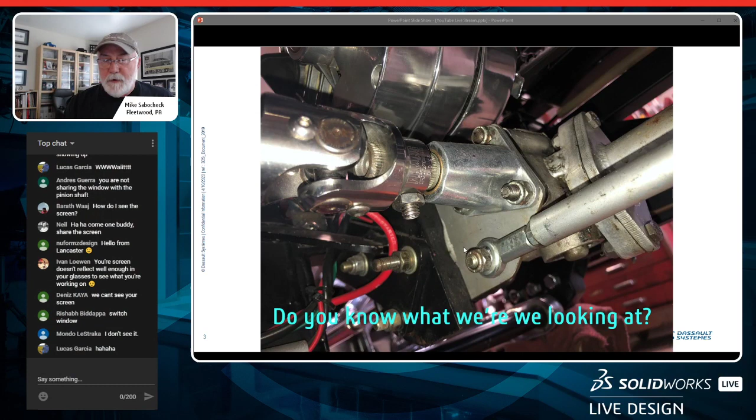So I'll describe that again. We've got the pinion shaft here, and that pinion shaft extends itself through the rest of the housing. I made this pinion support right here to support the shaft, because when I was turning the steering wheel, I would get some deflection at the end of the shaft, and that deflection was causing a little bit of a pause in my steering, so it wasn't very responsive. Along with the support, I also needed a bearing, so I used a bushing right here, which is pressed into the housing. I did some work prior to this, and made up some sketches of both the shaft and the support plate. Then there was this little cap used right here that mounted over the opening for the pinion shaft, which included a little bit of an O-ring, which acted as a seal on the end, preventing dirt from getting into the housing and affecting the gear.

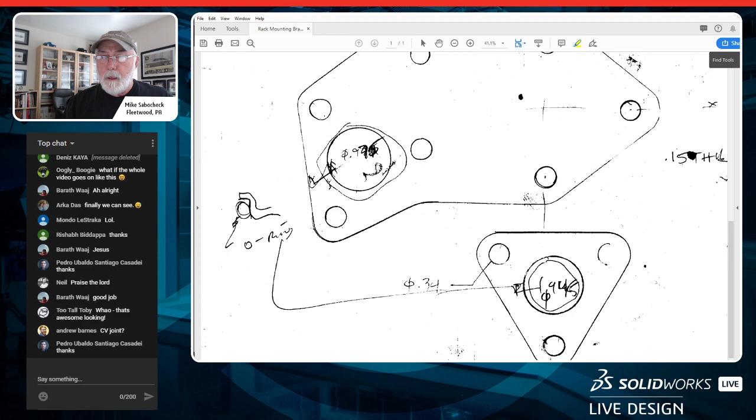So our task now is to design up this housing, and when I was doing my sketching, I used the appropriate tools here, a vernier and a machinist scale. This is not a ruler, but a machinist scale, so we can measure things to like 10,000ths of an inch, getting things fairly accurate.

Now a little bit about my hot rod. Her name is Violet, and you can probably figure out why, she's a pretty vibrant purple color. She's a 1931 Ford Model A four-door town sedan. Ford made two versions of a Model A sedan, a two-door and a four-door version, and I have the four-door version, which has three side windows, whereas the standard Model A had two. This is an original car, made back in 1931, so she's coming up on 89 years old, and she's been a hot rod for about 50 years. I can trace back to when she was built. I know the builder of the car, and we've talked many times about the build of the car and what he did and where he found the car to build the hot rod from.

I also have a magazine from 1975 that Violet was in. One of my passions is just to work on cars. Not only do I work on the hot rod, I've got another car in the garage, an MGB GT, that I put a lot of work into. So this is what I do on weekends during the wintertime when I can't be driving my cars.

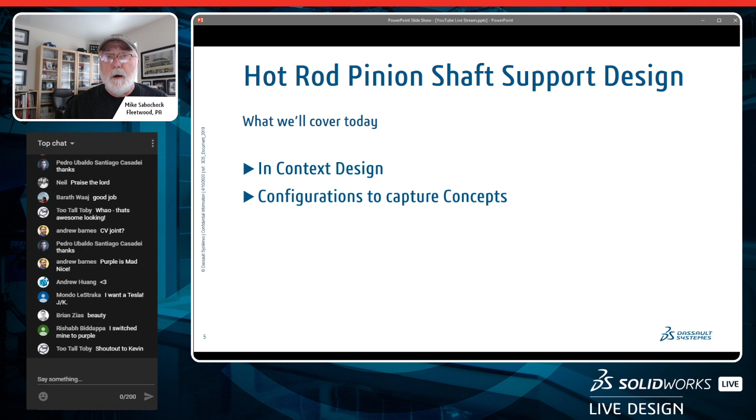Now this is what we're going to be covering today, so I want to give you a heads up on some things. In-context design: this design lends itself really well to being an in-context design. So what is in-context? Working within the context of the assembly to help me design my part. Next, configurations to capture the concepts I'm going to come up with, and not just one concept, but three different concepts. My mantra is: any work worth doing is work worth saving, and I can save that through the configurations.

Next, the property tab builder, probably a little known utility within SolidWorks that helps me capture custom properties pretty easily using a tab on the task pane. And smart components - we're going to be using a smart component, that bushing is a smart component, and I'm going to show you how to build them. It's pretty easy. Again, doing something once but leveraging it many times over, so we're not having to do this type of work on a continual basis.

So let's move over to SolidWorks here and get to work on our design. Like I said, I've already modeled up the parts that I'm going to need in order to design my housing or my support. So I've got the shaft and I've got the support plate.

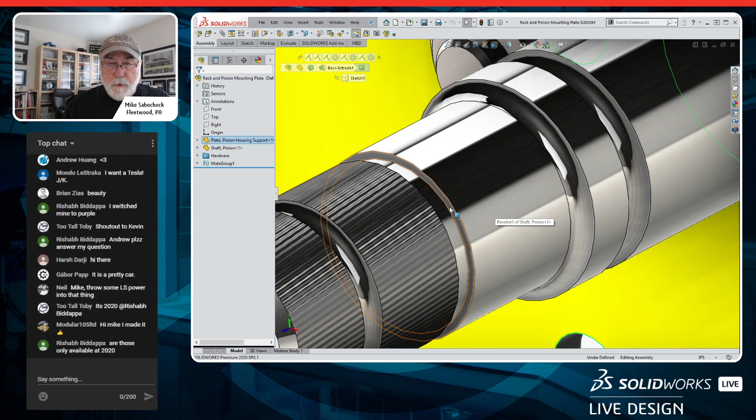Now if we just do a quick measurement here, just to give me an idea of how long I need the support for the shaft to be, SolidWorks is telling me that's going to be 2 inches, from the face of the plate out to the end of where the housing is going to end. So that 2 inches is going to be an important distance for me. I've got a lot of information here to work with.

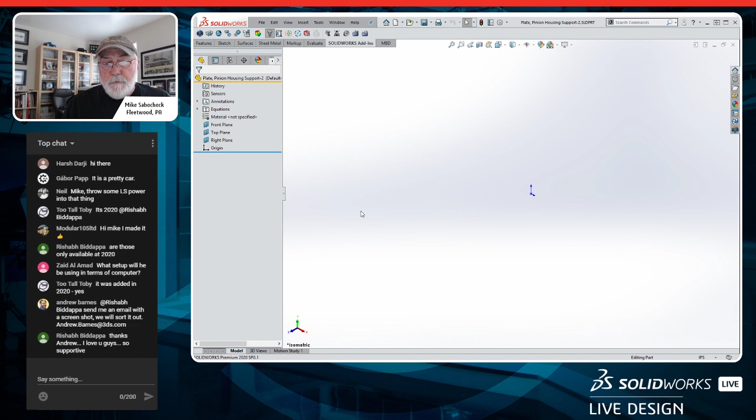So right off the bat, let's go into SolidWorks and insert a brand new part that we're going to use. This part here will be called - I've already got one there, so we're going to make a new one, so I don't have to type very much out here. Then where are we going to orientate this new part within the assembly? We'll put it and orientate it to the front of the plate. So we have that captured. My sketch is now open on the front plane of my new part.

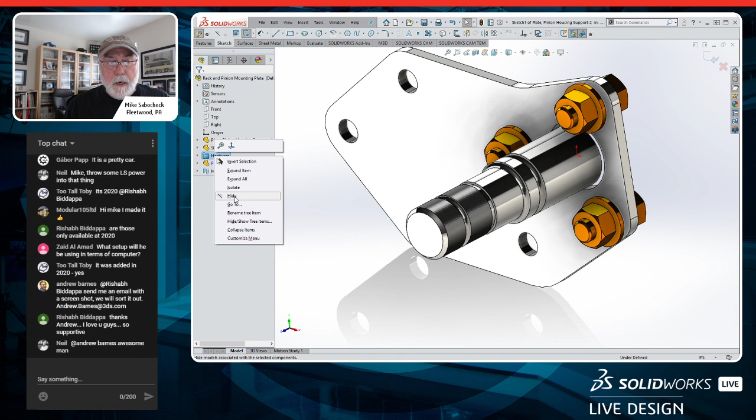Now I'm ready to start sketching, but let's get rid of this hardware here. Notice I've got my hardware in a folder, so that allows me to quickly hide them and manipulate them without having a very long design tree. Now I've got some edges here that are going to help me start my design - these 3 edges. My question is, do I want to create in-context relationships between my new part and this plate? I'm going to say yes to that, because this is pretty much a one-off design, and I just want to use these edges right here to get my design started.

Now I've got full control over that, meaning I can use an option here to turn off external references. So when I create my sketch, for instance in this case, if I go ahead and turn that off, and convert the edges that I've selected into a sketch that's blue - and we all know in SolidWorks that if I get a blue sketch, that means it's underdefined.

Well, that's not really what I want, so let's get rid of that. Let's turn our external references back on again, and I'll convert the edges again. And then I get those edges, and they're black, so it's telling me that I'm fully defined.

Okay, cool. I'm just going to extend these arcs out here a little bit. I'm going to add a circle to kind of mimic the other ones here to this hole. Wake up the center and drag that out some distance, because we're going to make it equal to the other ones here, equal to those two.

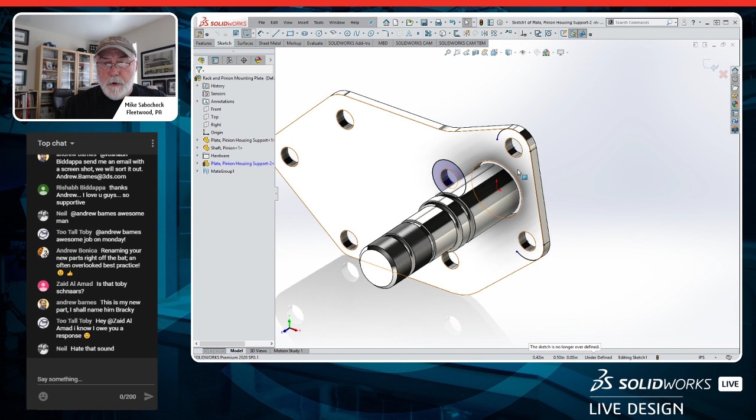Because it's got a dimension, we can get rid of that and the arrow too. Now I'll just add a line and create a tangency on both ends of that line. Double click and space to end that right there, then pick up the other one and create another relationship down here as tangency and coincident.

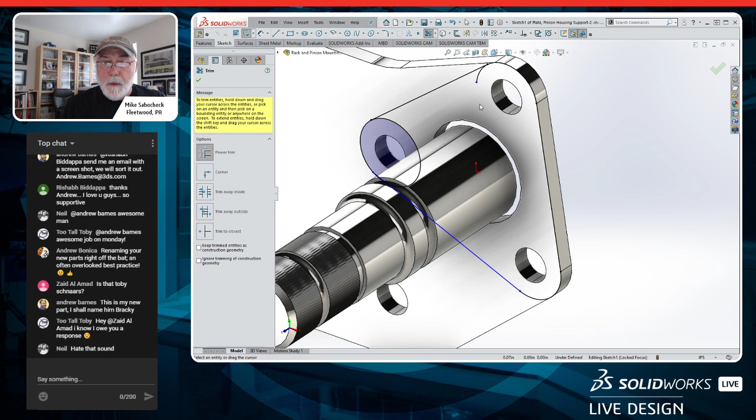Now we've got some additional geometry we need to get rid of here as far as the sketch is concerned, so we'll get rid of that guy, and this one, and this one. I've got to make sure I got a tangency relationship right here between these two. Oop, wrong button.

Okay, so we can finish this off pretty nicely. There we go. My sketch is black, it's fully defined, but I didn't even use a dimension or anything like that to capture my design intent.

Additionally, let's take these edges here of the holes and convert these into sketches also. So that now completes my profile of the flange that I'm going to use for my support.

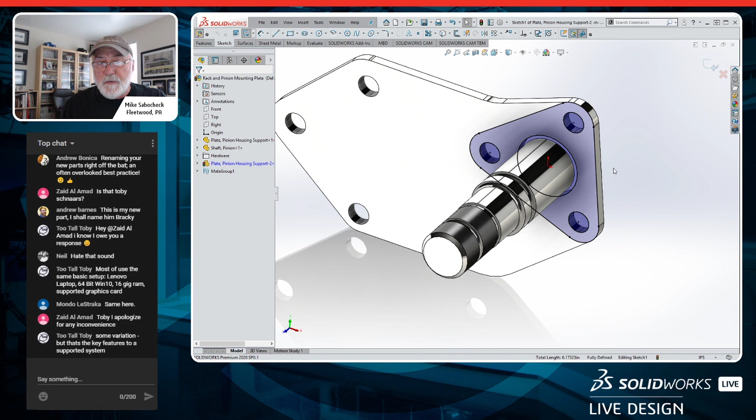I use the S key a lot. If you're not using the S key, try to use it, because it will cut down on your mouse travel and what you have to do. That S key allows me to access all of my favorite tools that I need when I'm working in SolidWorks. So I've got my first feature created.

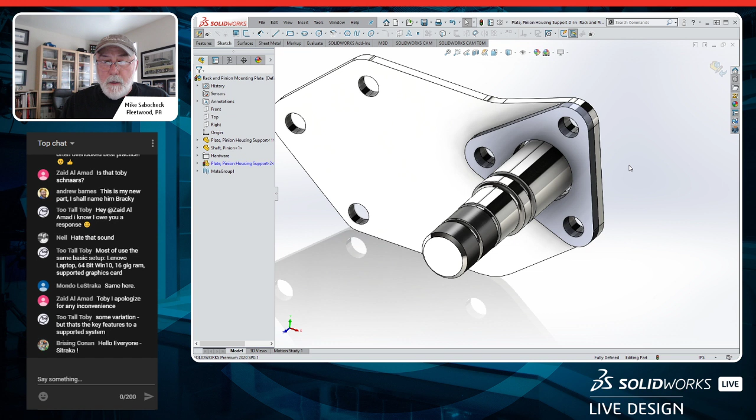So let's move over and open up the part in its own window here by itself. All right, let's zoom in here a little bit.

Now, good practice is to name your features as you go along here, so we're going to call that the flange.

I'm going to now start to do concepts on what I'd like my part to look like. So maybe the first concept I came up with was just something fairly simple, a cylinder that will extrude out from the face there. We'll make it 1 1/4 inches.

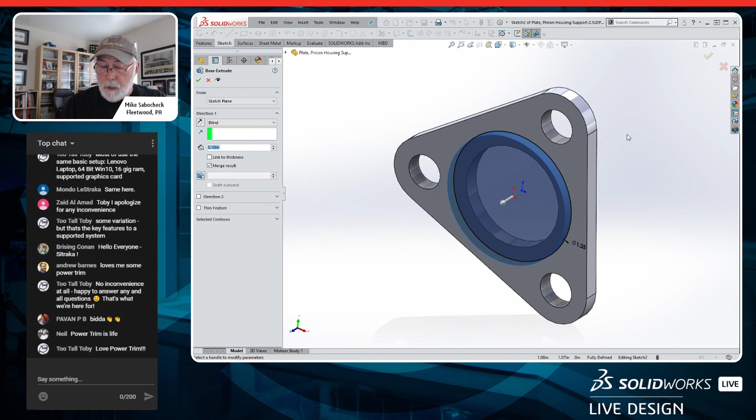We'll just extend this out, and we've got 2 inches. Now, the thickness of my flange is 150 thousandths, so my extrusion is going to be 1 inch and 850 thousandths. So all total, that will be 2 inches from the back to the front. Just a simple little extrusion.

Now, the other thing we're going to need to think about is maybe I'd like to have some ribbing on this to support it a little bit better, because we're going to be hogging the internal portions of this cylinder out in order to get the shaft through.

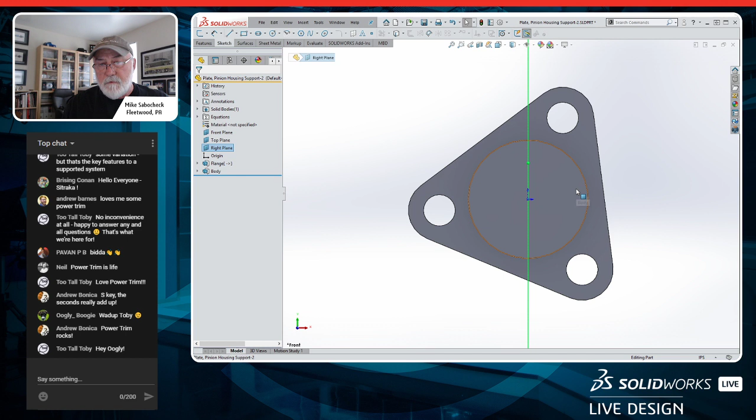So if we were to look at a front view here and look at the reference plane, the top plane is going through there. Well, that's not a really good plane for me to sketch on, nor is this a good plane to sketch on. So really what I'd like to have is a plane that bisects this face over here, or this edge. And that's exactly what I'll do.

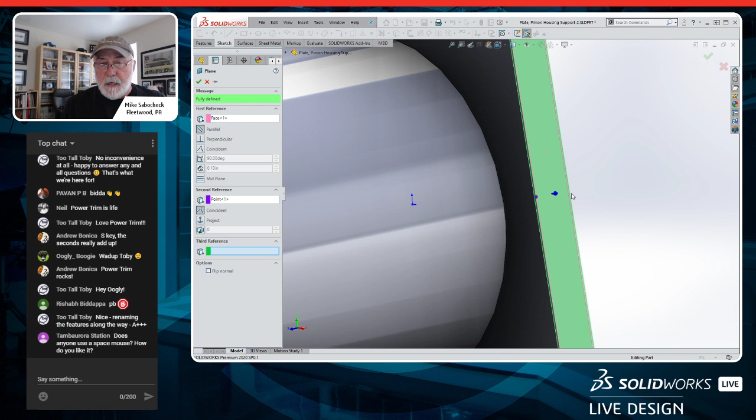So we'll select this one, we'll create a plane. I've got my first reference. My second reference is going to be the midpoint of that edge, and the third one is going to be the opposite side. We'll grab that midpoint right there, and that will now create a plane perpendicular to that face and allow me to sketch on that plane.

Okay, and we'll look normal to it. We'll just create a line down here and end it at the silhouette edge. Let's add a dimension.

And we'll just round it up to about 1 inch and 600 thousandths. Okay, all right, so that looks good. So let's create a rib and just say okay to that. Now we're good to go. So we have our rib created.

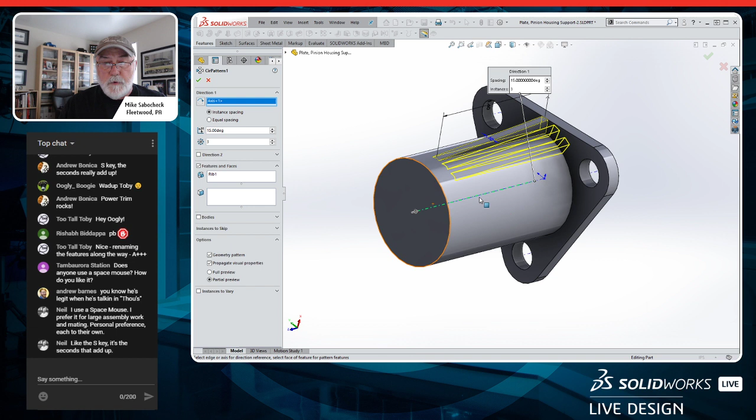Now obviously one rib is okay, but I'd like to have 3, and the best way to do that is to just go ahead and pattern these around the cylinder. So we'll grab our feature, which is going to be the rib. The orientation or direction is going to be my axis, and we'll go 120 degrees 3 times.

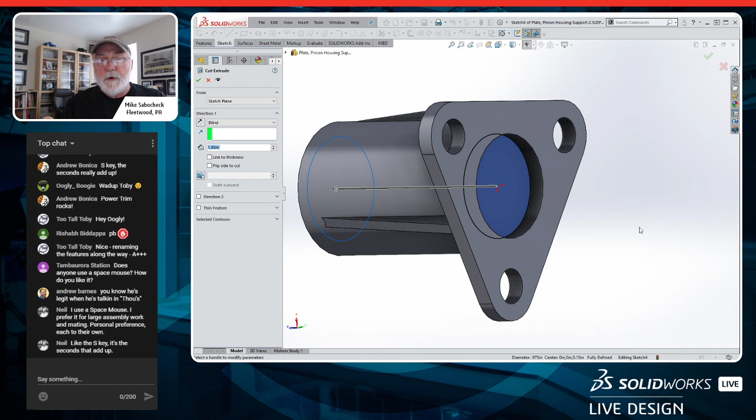All right, so now we've got our part almost completed. One thing we could do back here is open up a sketch, convert this edge to that edge right there, and then we'll use that as a cut, but we're not going to go through all because I need to leave some material to be able to put the bronze bushing in. So we'll go 1 inch and 350 thousandths, or 1.35 inches, and we'll just cut that material away.

All right, now maybe the last thing I need to do here is round and fillet the edges, and so we'd like to have some smoothness here. But let's make sure that we've got our features named. We got the rib.

We'll just call this the rib pattern. And we'll just say cut for shaft. All right, if I can spell correctly today. There we go. All right, so rounding and filleting.

Now I can go ahead and window select all of the edges that we see right here, but I'm not going to do that. I'm going to let SolidWorks help me find the edges that I need to round and fillet. As I peruse through the selection toolbar right here, it's highlighting the edges that it will round and fillet. And then I just need to apply the size of fillet and round that I want.

Okay, probably got a couple edges in here that I don't need. I see what the problem is. When I created my sketch for the rib, I didn't get it completed to exactly where I wanted it to be. It needs to be up onto the edge up here.

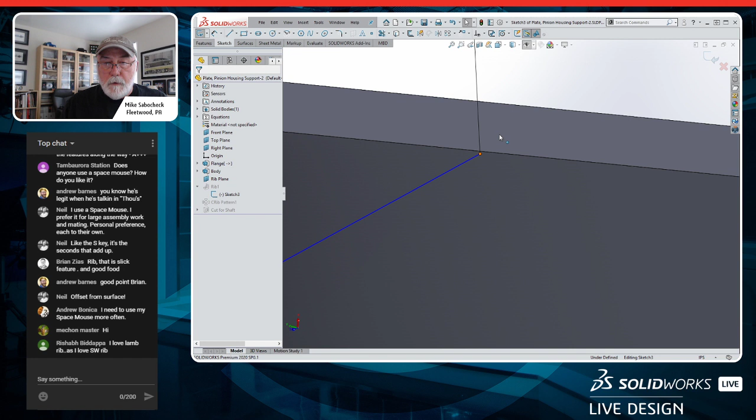So let's create that pierce relationship. That's one of Toby's favorite commands, is that pierce relationship. Okay, let's go back to the round and filleting. Again, just select an edge, and we'll go grab those. There we go.

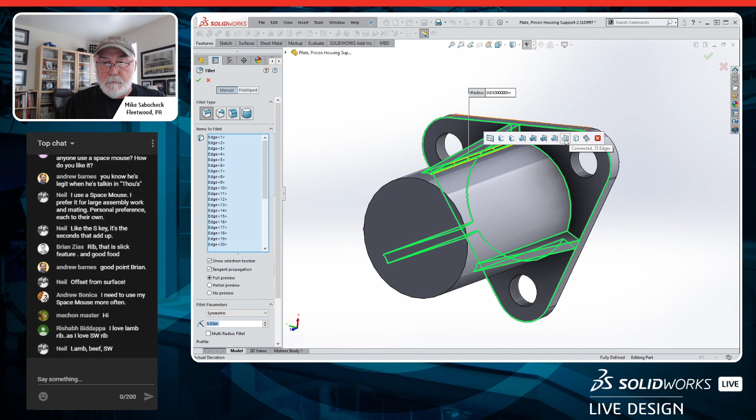Okay, now this looks pretty good. Now maybe we could put another one here, but we'll leave it right there.

Now, as I said, I'm going to create configurations here of my support. So we're going to call this concept 1. And then we're going to create another one while I'm here, and we'll obviously call it concept 2. And we'll move over to the other side.

Now I'm going to take all of the features for concept 1 and add them to a folder and call it concept 1. So I've got all of those moved over into that folder, neatening things up. And then I could take the folder and suppress everything in the folder.

Now my second concept, maybe I'd like to make it a little bit more fancier, right, as opposed to just a straight cylinder. So again, we'll open up a sketch here, and the first thing I'm going to do is we'll sketch up some circles that are just a little bit bigger than the edge of the part.

Okay, so moving them out there. Come over here, do the same thing. But I'm not going to go ahead and sketch up the other ones. So let's actually make this one a little bit smaller. And let's just copy each one of these circles. We'll just copy that one there, and we'll copy this one down here. Hopefully everybody knew that you could do that.

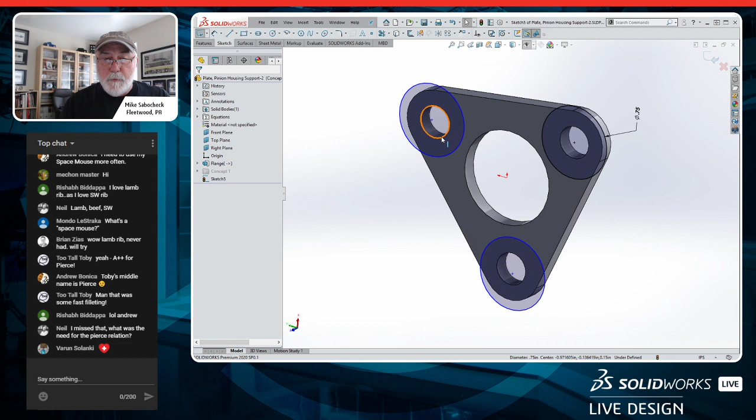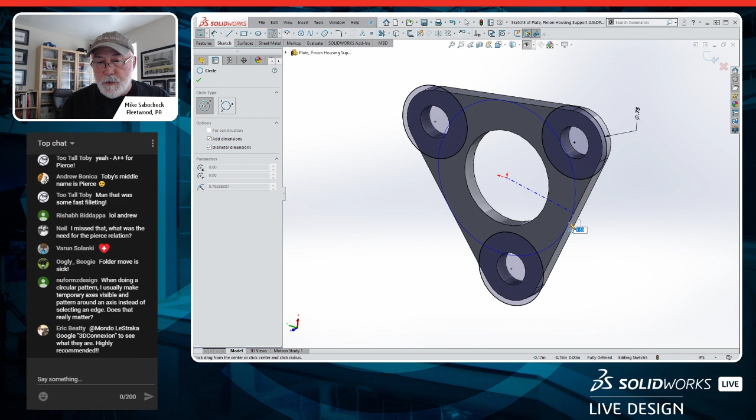So we'll just wake up the centers and drop these onto the centers. And then go ahead and control select all of the circles, and we'll make them equal. And then we'll add another circle and make it tangent to the outside edge here. Okay, right there. Obviously I'm not going to sketch or I could select different areas here to extrude, but let's just go ahead and trim those away. Okay, so that's my sketch that I'd like to use.

And we'll extrude this. Now, instead of extruding linearly, we're going to add some draft to it. So let's add like 3 millimeters of draft. But you know what? I think that's going to be too small out here. So we'll leave it at 3 degrees of draft, not 3 millimeters.

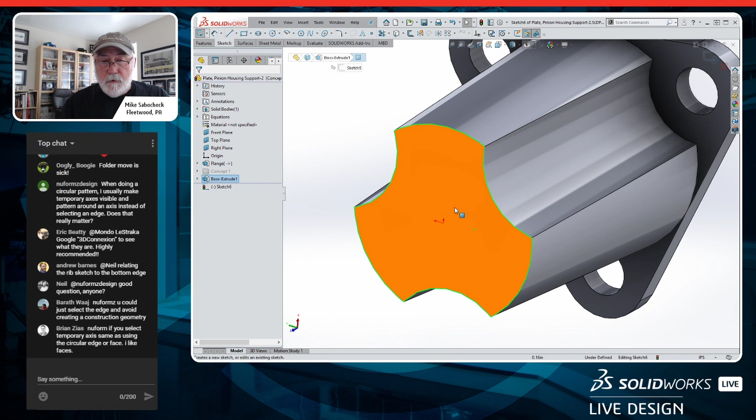All right, but let's do a design check here on this face. I know the diameter that I need to have in order to put the bronze bushing in, and that's going to be about 880 thousandths. And I don't want to leave it just as that, so let's convert it over to construction geometry.

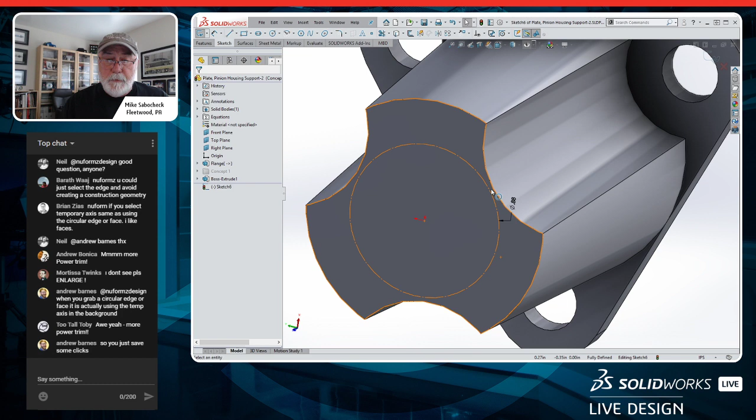Now, what I see here is I've got a lot of material here that really isn't going to be doing much for me, but I don't have enough material right here for the bronze bushing to get pressed into. Maybe that might even crack. And the other thing I really don't like too is the fact that this face right here actually gets bigger as it goes out because of the draft. And the other thing too is it's not really a constant radius because these are conical faces. So subsequently, this kind of looks okay, but I think I can do better.

All right, so we'll just leave this as is. All right, and we'll put these two features into a folder, and we'll call this one Concept 2. All right.

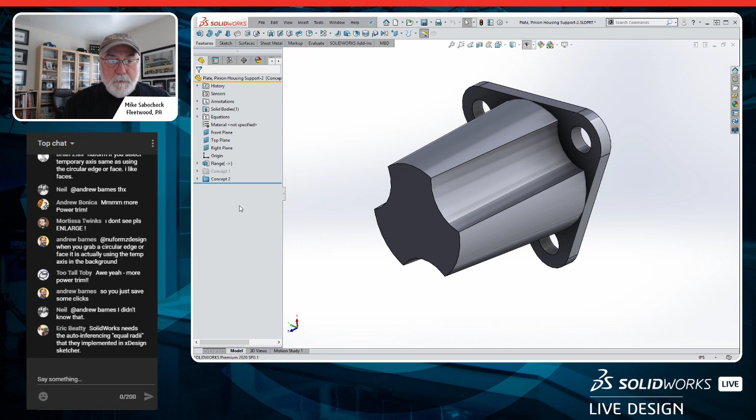Now let's create one more concept, and we'll call it Concept 3. Concept 3 is going to be fairly similar to what we just did. So we'll go back into Concept 3, and first off we'll open up a sketch on this face here.

I'm going to just borrow that sketch again, so we'll convert it into a sketch on this sketch plane for the new feature I'm creating. Then we'll extrude the same thing, but without draft this time.

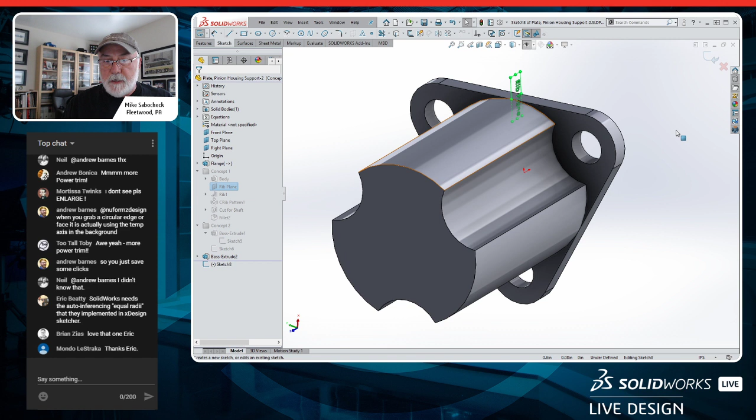Now I'll go back to that plane we used for the rib and open up a sketch on that. Even though it's suppressed, I can still open up a sketch on it. And we'll look normal to that.

I'm going to draw a line from there, making sure I get my reference correct. Then I can create that coincident relationship, and we'll add an angular dimension from the edge of the cylinder over. We'll hold it right there and make it 4 degrees.

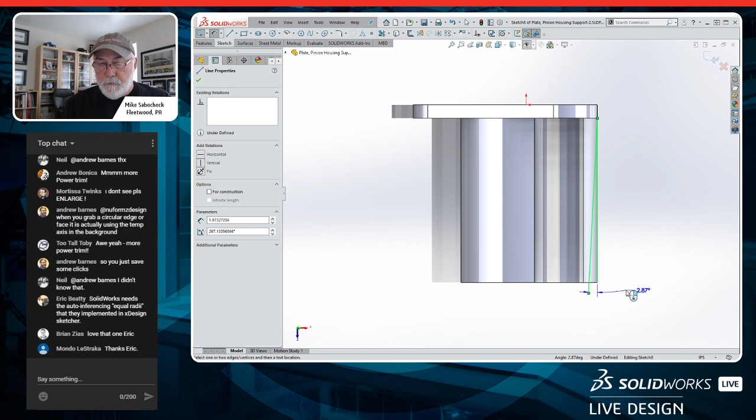Okay, good to go. Now with that sketch, we'll create a surface from it. Let's turn that on, and exit out of the sketch here.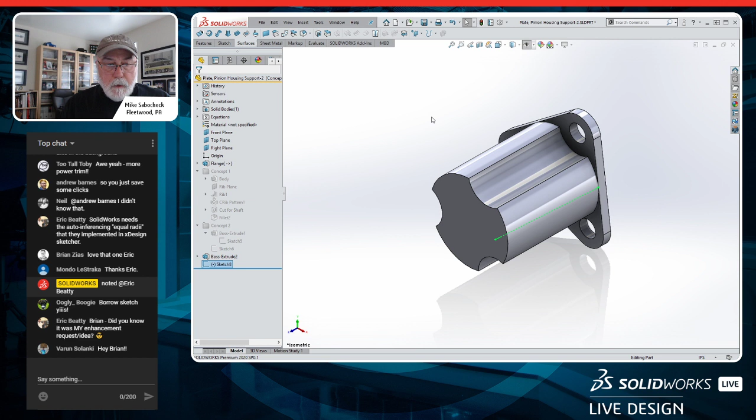Show my reference. I'm going to grab my sketch there, make sure I got that, and show my axis of revolution. I should be able to shoot. Show my axes here. Well, let's put one in. So insert, reference geometry, put an axis in, right there.

Okay, so we've got the axes that we're going to need. And grab my sketch again. Okay, and my axis of revolution, there we go.

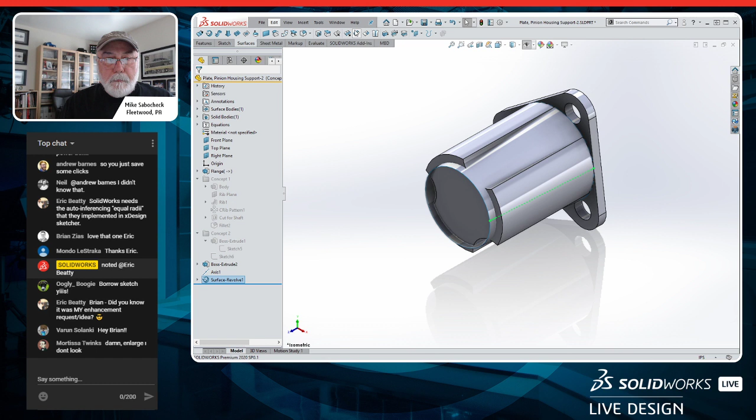Okay, and then we'll use that surface as a cut, and make sure we go in the right direction. We want to remove the material outside of that surface, not inside of it. There we go. And let's shut that surface off.

Okay, so this is more what I'd like to have. This face here, now again, still conical, but it's not conical anymore, because it's constant radius, as we see right down here at the bottom.

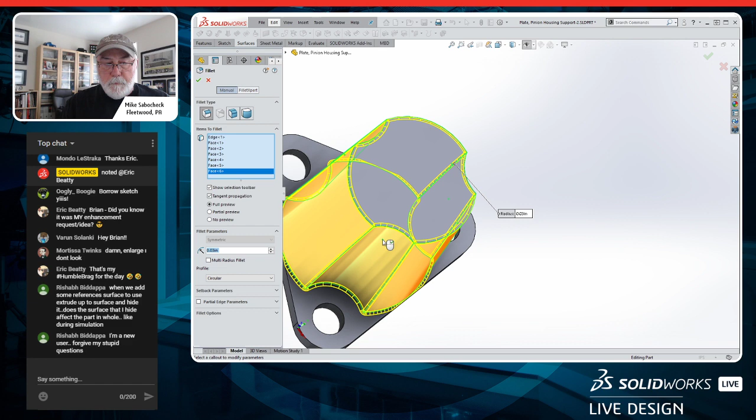And then lastly, we'll go ahead and create our rounds and fillets on our edges here. Again we'll use that same face, and in this case we'll just grab some faces and round these guys all off right here - just a different way of being able to select. All right, so we'll just go ahead and finish it off right there.

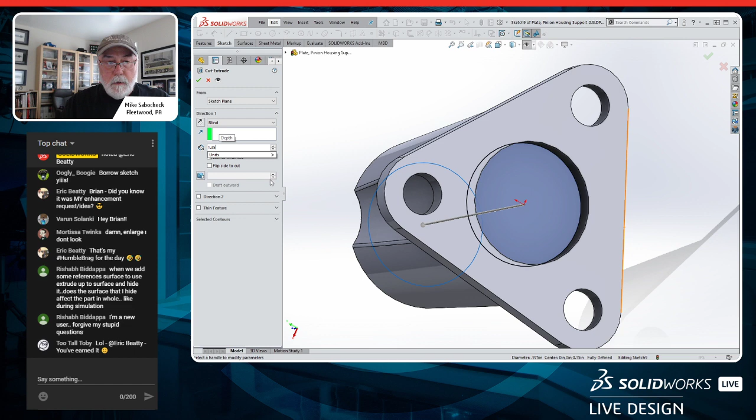Okay, so here's my part, almost finished. We'll just add that cut on the back surface here. And we'll convert that edge and create our cutout. But again, we're only going down 1 inch and 350 thousandths inside there.

Now, another thing I mentioned at the beginning, the things we're going to be covering today, one is a property tab. So over here we have the custom property tab, and this is going to help me capture properties. I've got different property files that I can work with.

So we've got a space here for a part number, so we can add our part number. Our description is going to be support, comma, pinion shaft, and who's it drawn by, and when did I draw it? Today. Is this a make or a buy?

If we switch over to buy, then my fields down below change accordingly - I get vendor part number, and then the vendors. We have a list of vendors we can say are certified vendors that we work with, but we're going to be making this.

What's the material? Now watch in the feature manager design tree over here to the left when I change the material to 1060 aluminum. The reason this is getting prompted is because we're going to be making a change here.

And then what is the finish? Well, we can say it's an anodized finish. Also I've got another property here that's getting extracted, and that's the weight, so I kind of know how heavy this part is going to be. When I'm working on race cars, weight is a consideration I'm always concerned about.

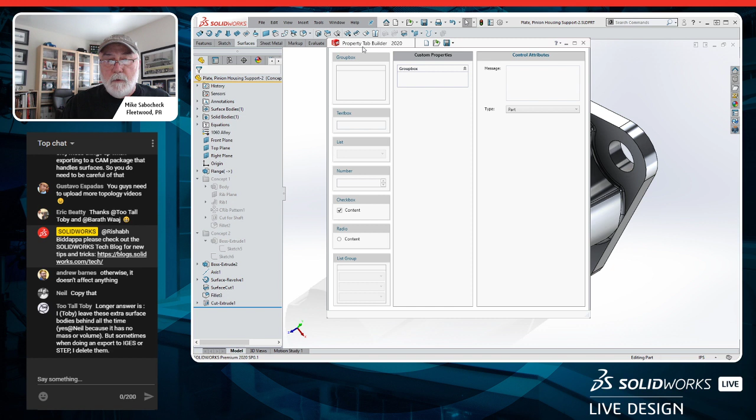We can open up, for instance, something that I've been working on. We have a property file here. These are files that get placed into whatever folder you want, and then in system options, file locations, that's where you define where the location of these files are at.

Now we work with group boxes. You have to start with a group box in order to apply whatever you want: text, lists, numbers, checkboxes, radios, and a list group.

So here on the bottom, I've got my part number. I've got, for instance, the number of pieces that we might need, a description. Well, maybe I'd like to have a little bit more. We'll add down at the bottom here, we're going to add material.

And then the name from the list that we want is material. And I don't want to allow custom values because we only use a subset of materials, and I don't want somebody using some oddball material that we would have to go out and procure.

I'd also like to have a text box. The text box is going to be weight. And this is going to be a property that we can extract from our part file, and it's going to be just a text value. So it's only going to be read-only, because I want this to be a one-way display, meaning that the weight is displayed and it can't be changed.

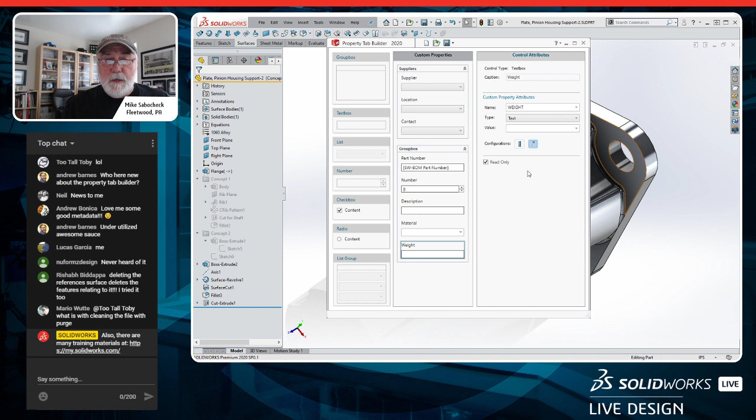We'll go ahead and save these off, and then I've got my file created that I can now create my custom property tab and capture the types of properties that I have. And these properties show up here. Now, if I didn't have that, I'd have to come in here and add each one of these properties, meaning to come in here and select what I want and fill out the values and things like that. So at least I cut down on the amount of work that I'm doing here by being prompted for the type of properties that I want.

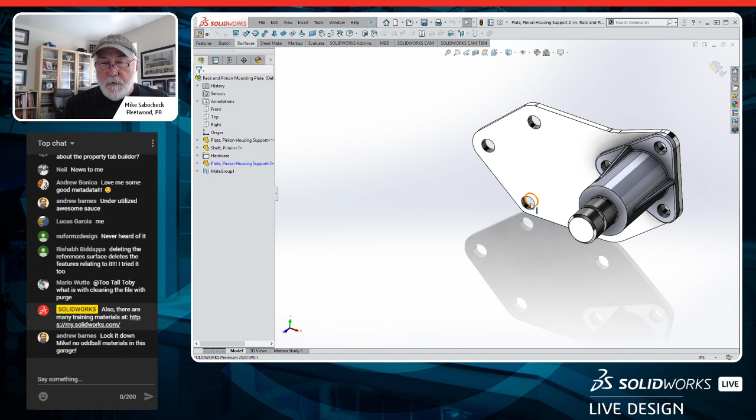Okay, now that we've got our part finished, let's come down here to our assembly, because the assembly is going to be showing the configuration that I originally started with, and that was concept number 1. So let's change this to concept 2.

Well, actually not. Let's change this to, as we see, we got concept 2 there, and let's go back and let's change it to concept 3, because concept 3 is the one that I want to work with, and this is the one that I want to have manufactured.

So as we see, everything is lined up beautifully. All of the holes are lined up. I'm face to face here as far as the edges are concerned, and the part looks pretty nice. All right, I really like the way the part has come out. So we can now start to do maybe some other kind of work.

But before I get to a drawing, I need to put that bushing in. So let's turn to our design library. Design library, I've got a folder here for parts, and underneath parts I have bushings. So I've got two bushings here that I've saved off.

One is a bronze bushing that's got a flange on it, and the one we're going to use does not have a flange on it. I don't need a flange on this particular case, because I'm not going to be having anything touch that flange.

So I'm going to just simply drag and drop it out of the design library and drop it here in space. Now, even though that my part has got a mate reference associated with it, I want to show you another way to mate parts together. You may or may not be familiar with smart mating.

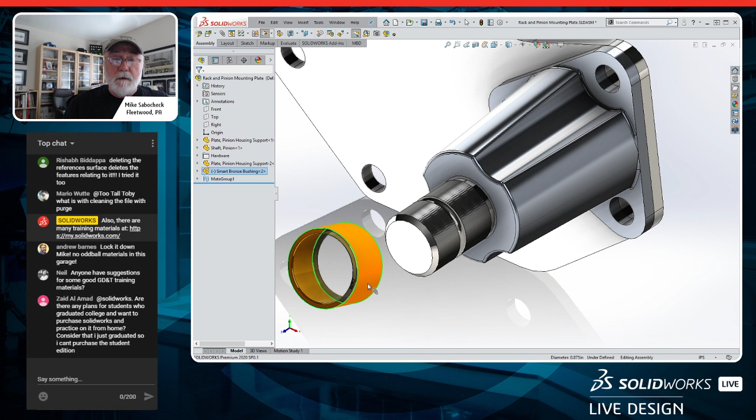Now, what I'm doing is holding my Alt key down. I got my Alt key pressed down first. I'm going to select the face that I want to create, in this case, a concentric mate. So I'll just hover over some other geometry that has the ability to create that concentric mate. Pretty straightforward. Again, I don't have to use quick mates, I don't have to go into the mate dialog box.

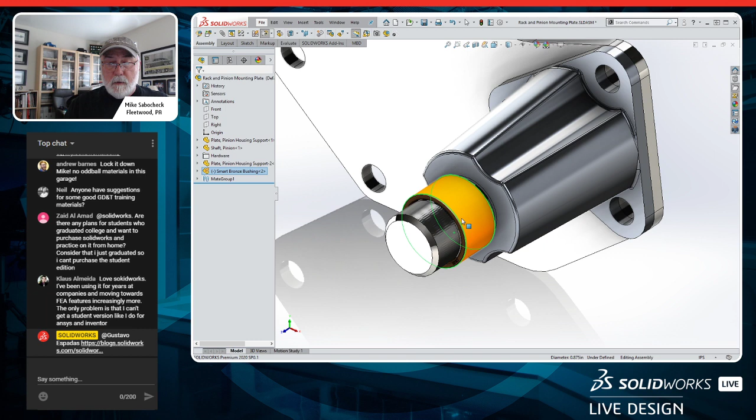I don't have to do anything except select those two faces, and I just pulled it off. I make sure I get my coincident mate there, so I've got the bushing right on the shaft. The second mate is this face coincident with the front face of the support. Now, what is a smart component really going to do for me?

Well, if we look in the FeatureManager design tree, we see the icon for the component has a little lightning bolt through it. That signifies this component is a smart component. If I click on the component, I also get a lightning bolt over here, and my tooltip says Insert Smart Features.

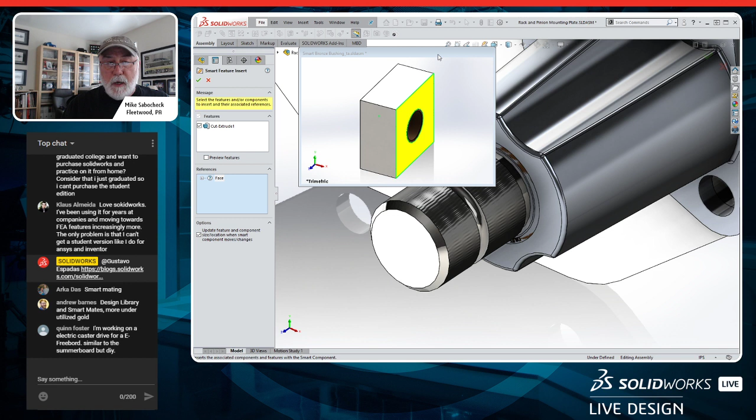So when I click that, I'm going to execute adding the smart feature, which is going to be the cut extrude. But I need to identify the reference. This is important - when I show you how we're going to create this, I'll explain the importance of making sure we've got the right face selected. So I get a green check mark, so that is good.

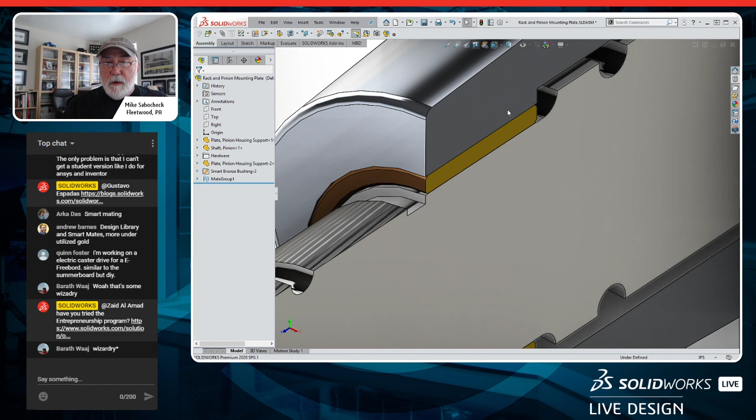And then we'll go ahead and execute and add the cutout, or in this case, the bore, for my bushing. As we see right here, we've got our face right there, and now the hole is created. Now if we quickly hide the bushing, and if I double-click this face...

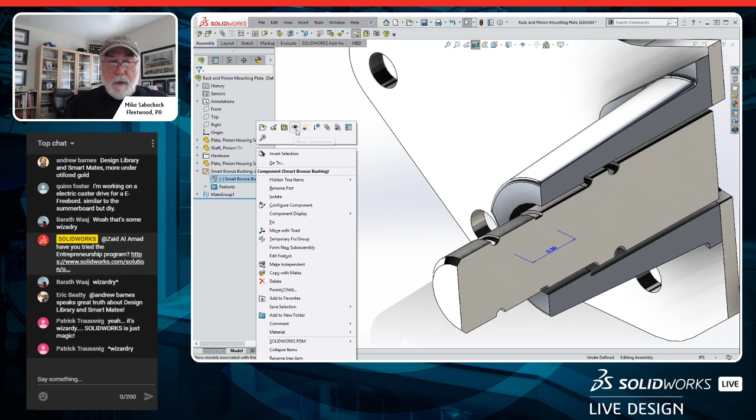I'm going to get the dimension for the bore right here, along with its associated tolerance, because the tolerance is fairly tight, and rightly so for this bushing - obviously we don't want to over-press it, meaning a lot of interference, because we might break it. So it's got to have the right size, and having the smart feature create that bore for me, I get that dimension, and I make sure that once we get to a drawing, that is going to be included in the drawing. So now that we've got the part completed, let's go and do exactly that.

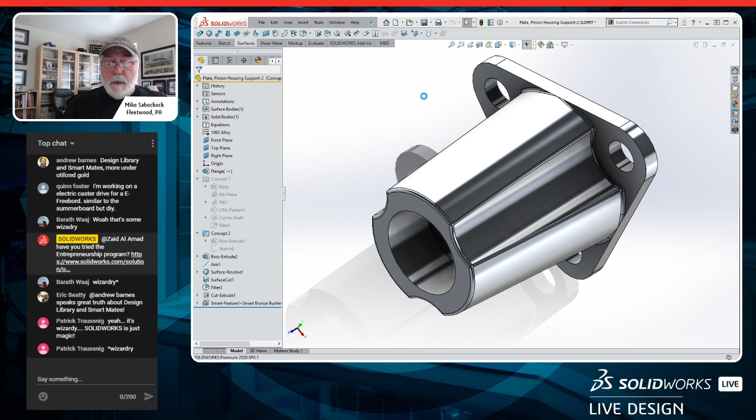Let's create our drawing. So let's open the part back up in its own window. We'll go ahead and make drawing from part. I'll grab my drawing template that I want to use. The C size should be more than enough.

And then I'll drag in a front view and a right side view. And then obviously we always like to have our ISO view, so we'll put it up in the upper right hand corner. Now, before I do anything else, the orientation of the front view is the orientation of the part in the assembly, and we'd like to make sure this part is squared up, meaning I would like to rotate this.

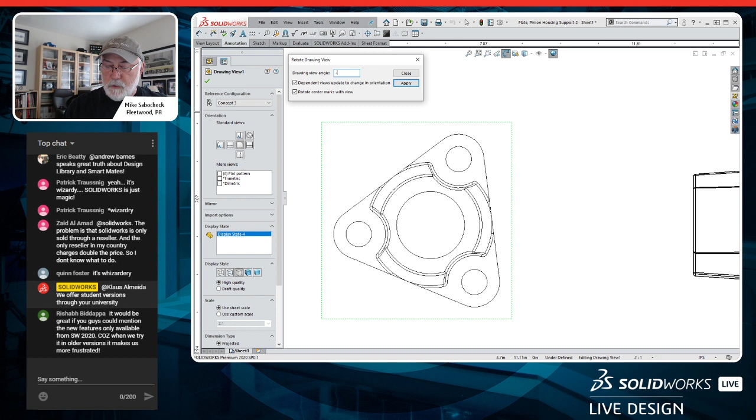So what do I have to do - go back to the model and create some special view there, and then come back here and use that? Well, no. We can do this pretty much like we do in the part file, where I've got 3D space and I can rotate the part around in 3 dimensions. Here I've only got 2 dimensions, but we can do the same thing. We can rotate this view the right amount, as far as the angle is concerned, and I measured that earlier, so we'll go ahead and apply that and rotate the view. Maybe you didn't know you could do that.

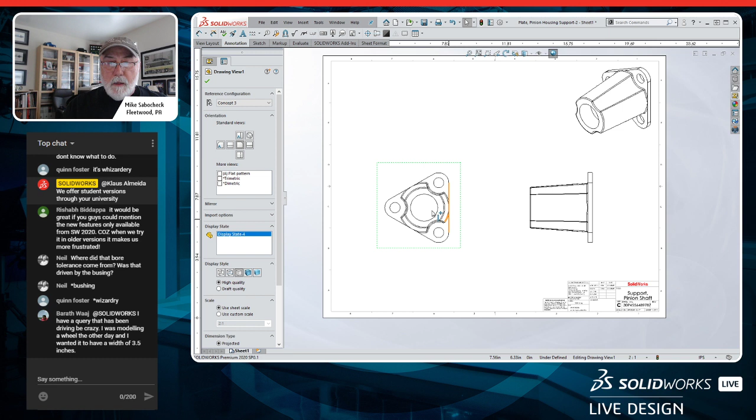All right, so now I've got my views oriented the way I'd like them to be, which is nice and neat, and everything is centered up. So maybe another view I'll create, again using my S key to get a section view, and we'll come in here and hit the tab key and reorient that, and anchor my section line down through the center of my part, and we'll put the section view up above.

But the one thing I see is I'd like to have it flipped the other way. So let's flip the section line and look at it from the opposite direction, and that's what I can do right here - I can just double-click on the section line and it will flip the view for me. Well, it hasn't yet, because if you see the cross-hatching here around the view, that tells me it's out of date. So we can just do a quick rebuild and then flip the part the right way.

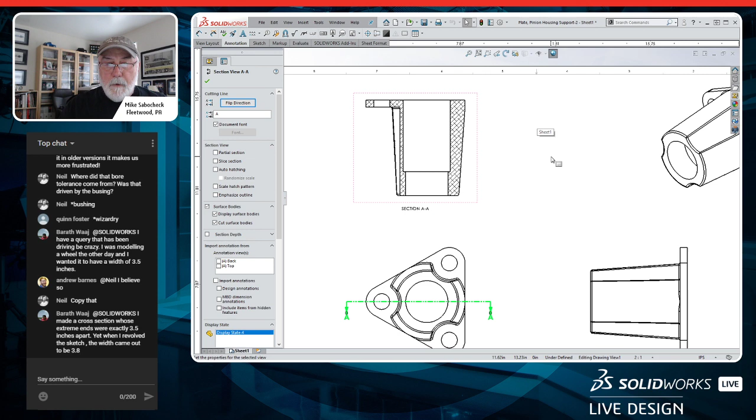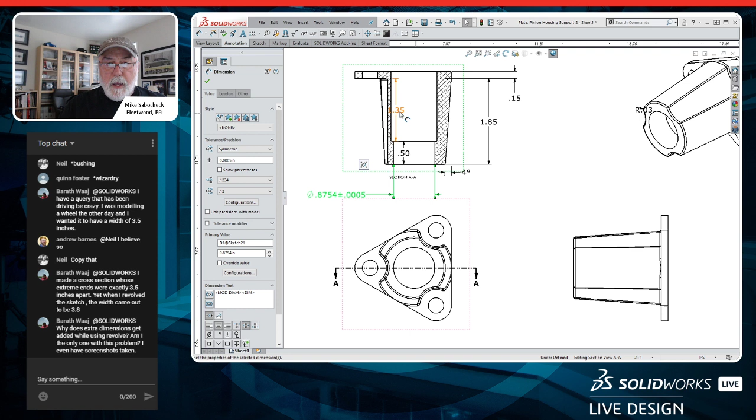Let's insert the model items that we used in the modeling - the sketch dimensions and the feature dimensions. Now you can see they all come in here at the top view, and some of these maybe are applicable to the top view, maybe some of them aren't.

For instance, maybe we can keep the bore diameter there, but some of these other dimensions could be better displayed in the right side view. So do we dimension these over again? Not exactly. If I'm holding down my shift key, it's just like moving a document in Windows Explorer from one folder to another - I click on it, hold shift, and drag it to another folder. It's the same here: holding shift, I drag and drop it over to the right view and drop it in right there, cutting down on the amount of work so I don't have to redimension things over and over again.

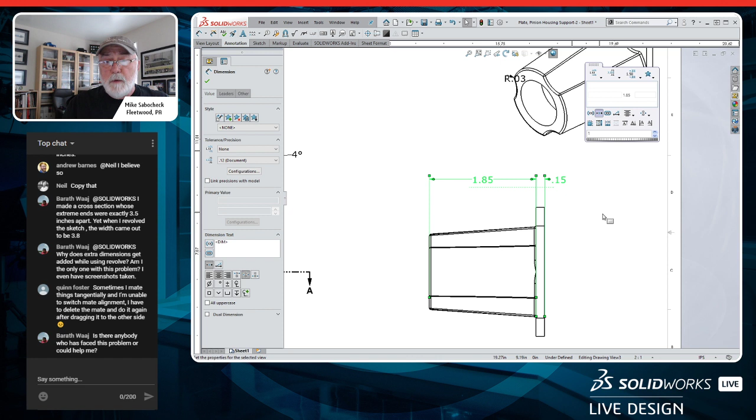Maybe some other things you didn't know you could do here. For instance, if I just do that, I've got both dimensions on top of each other - so what do I do with that? I'll select both of them and come into this little window we get for dimensions, and auto arrange those dimensions again to honor the spacing we have set up in document properties. In this case they just put them in line because they work really well in line. We can still keep our radial dimension up there for the fillets and the rounds.

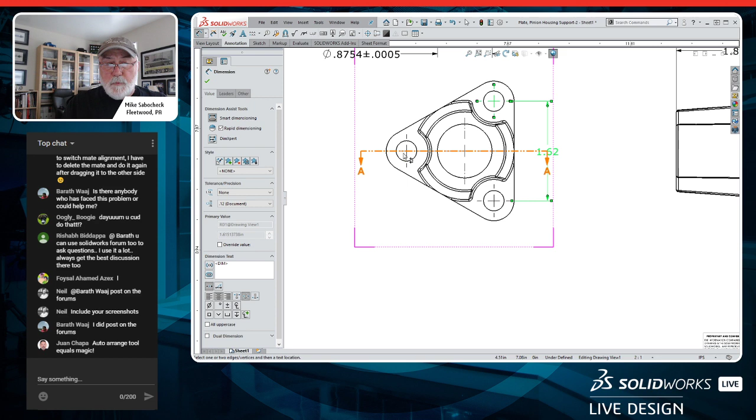Here in the front view, maybe we'd like to put in some center lines, and then add some dimensions using the center lines. This little widget here allows me to place the dimension on either side of the view, so especially when I'm zoomed into a particular area and the dimension is off the screen, I don't have to zoom out to place it - I can use that to place the dimension exactly where I want it to be.

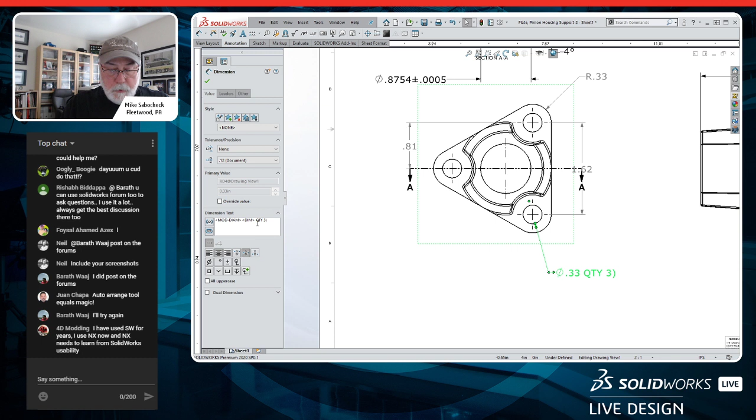Maybe some other dimensions for the corner radii here - again I can use which quadrant I want to place this dimension in. We can add in our hole diameter here, maybe add in a quantity of 3, place that there. I missed the parenthesis, but that's okay, we'll put that back in. Move this dimension out away from the section lines just for clarity.

So we don't need a whole lot of dimensions because we're going to be using a CNC process to create the part for us. We're not necessarily going to be using all of it, but I'd like to have this documented anyway just for clarity's sake. And lastly, we've got our diameter dimension for our bore for the bushing. This looks pretty good. Now I'm not too concerned about the properties for this drawing because a lot of the properties are going to be coming from the actual part itself. So we'll go ahead and save this off.

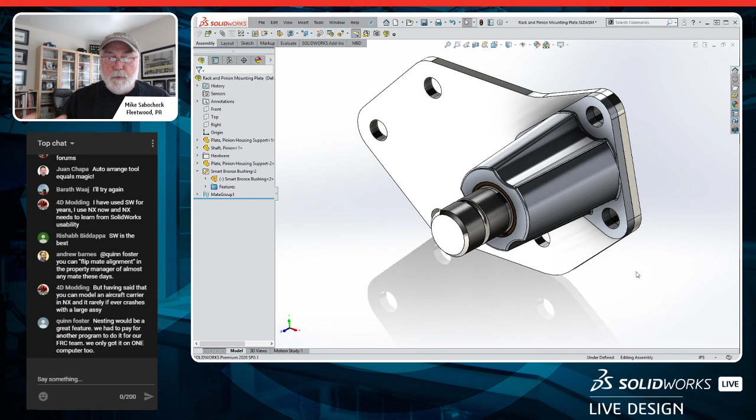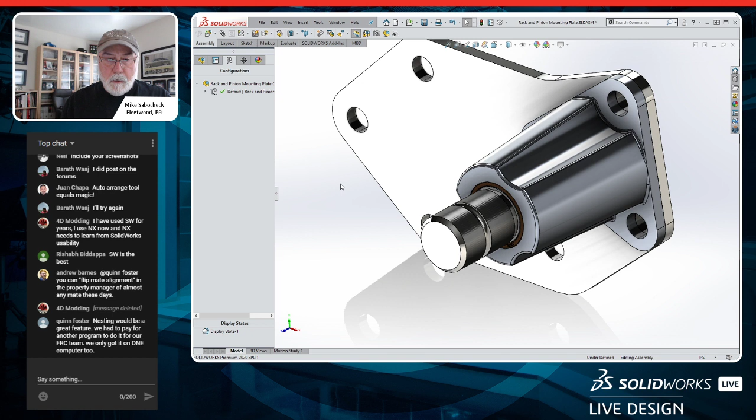Now let's go back to our assembly, and we'll do some extra work here with the assembly. We always like to have an exploded view of our assembly that we can put on a drawing, so we've got all of the parts separated and we can balloon them pretty easily. So let's do that. But before we do that, I got a little bit ahead of myself - I didn't talk about how we created our bushing, our smart component. So let's do a quick review of our smart component here.

Now, the bushing is in what I call a sacrificial part. This block right here has one feature in it, the extrude - but more importantly, it's the cut extrude. This is the bore that the Oilite bearing needs to be pressed into. And as you can see, the bushing's already got its smart features, so I'm going to delete those and do it over again. Let's go down under the tools pulldown - we see we have make smart component, this guy right here. Let's go into that.

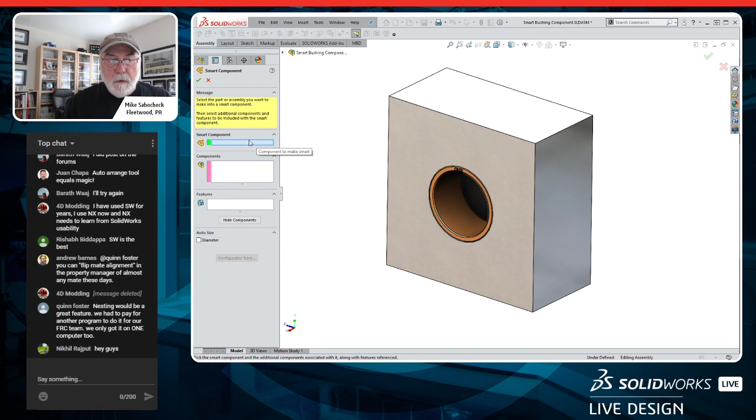Now it's going to be the smart component that's the bushing. We also have an area for components, let me describe that a bit. Say for instance we've got an electrical connector with an odd cutout that needs to be put into a sheet metal chassis, along with two holes for screws. We can put the holes in, as we saw with the bushing where we put the bore in, but what about those screws? I'd like those screws to tag along with this smart component - that's what the component dialog box here in the smart component property manager is for.

So I can identify those screws as part of this assembly, as part of this smart component. Subsequently, when I put that connector assembly into a sheet metal assembly, I can execute the smart components. It puts the holes in, and it also puts the fasteners in with me, saving me work for having to do all of those extra steps.

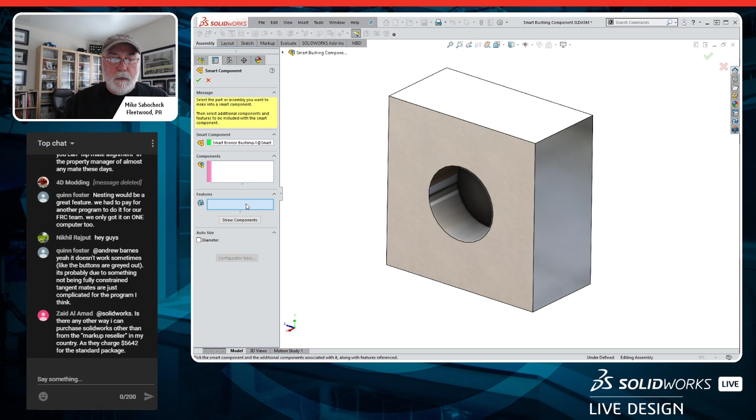The feature that I want to define is going to be that cutout. Now, when I placed the smart component into the assembly, I mentioned that the reference face that I selected was important, because the sketch for that cutout resides on this face right here.

Now, if I had inadvertently rotated the bushing 180 degrees and put it in backwards, and then went to execute the smart feature, it would give me an error. That error was primarily saying, I don't find a face for me to put the sketch on. The face that you've identified is not in line with the sketch, so that will give me an error.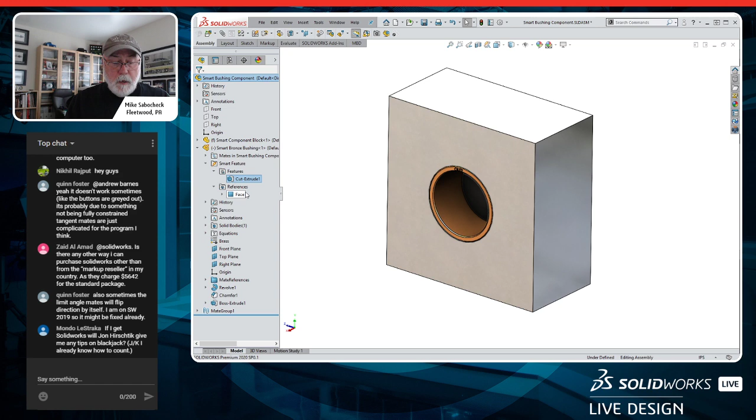So just be aware of that when you create your smart components. We need to have consistency when we place them after we've created them. That's why we're able to look at the features, get an understanding of what is comprised of this smart component, and we can also look at the face that is defining that smart component. Those two things are very important. Okay, so that's how you create a smart component.

And again, they can be fairly straightforward, like the one we have right here, or you can make them complex with additional components like screws and nuts and washers and things like that.

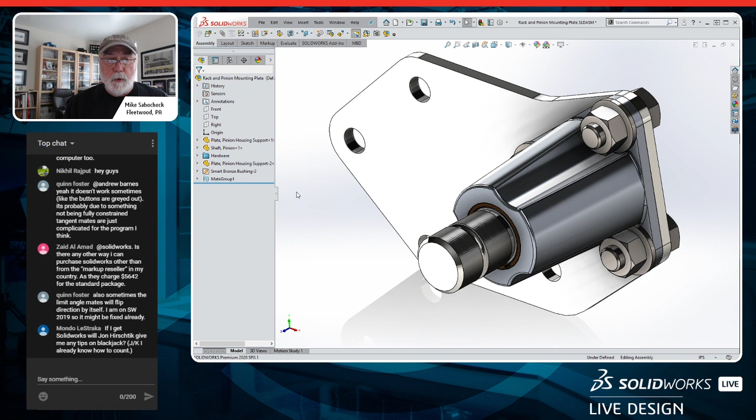Okay, so we've got now our assembly fairly well defined here. So let's come in and let's show our hardware, because I want to include this in my exploded assembly. Let's delete the one that's in there right now, and we'll recreate a new one, a new exploded view.

So what do I want to explode first? Let's think about that. How would I take this assembly apart? I'm obviously going to have to move or remove the hardware. Let's get rid of the hardware first, so we can grab the nuts and the washers at the same time, and move them out to the left. As you can see, we're exploding and moving the nuts and washers apart from each other. That'll be my first step.

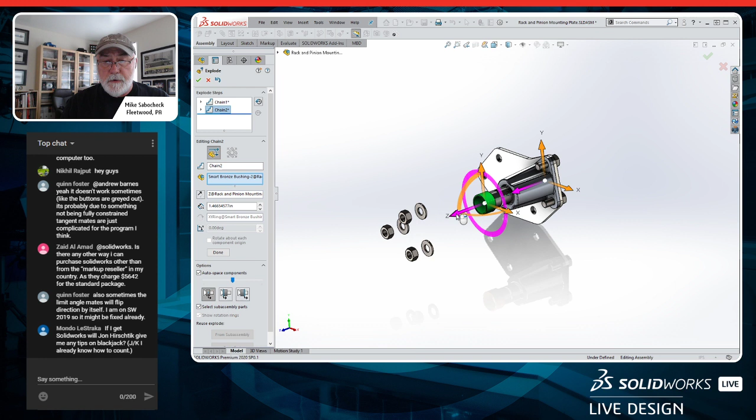My second step will be the bushing. Let's move the bushing out away from the rest of the assembly, and put it approximately there. Then the last step will be moving the housing out and putting that approximately there.

Let's go back and edit that. I had my finger on the escape key and inadvertently hit it. So let's do this one more time, just for practice. You've got to watch where your fingers are at on the keyboard, otherwise you'll cancel the work that you just did. My bad.

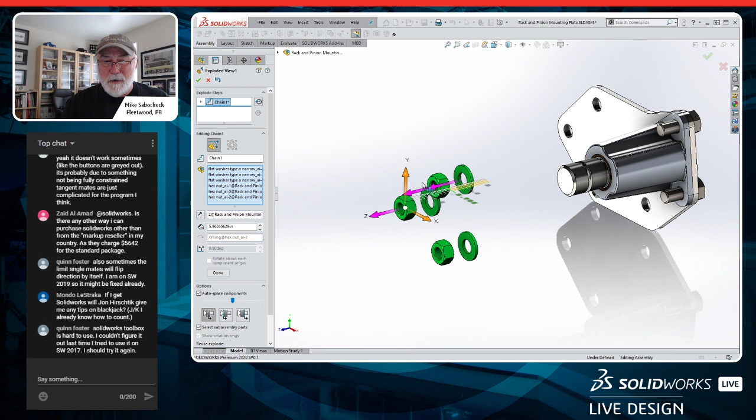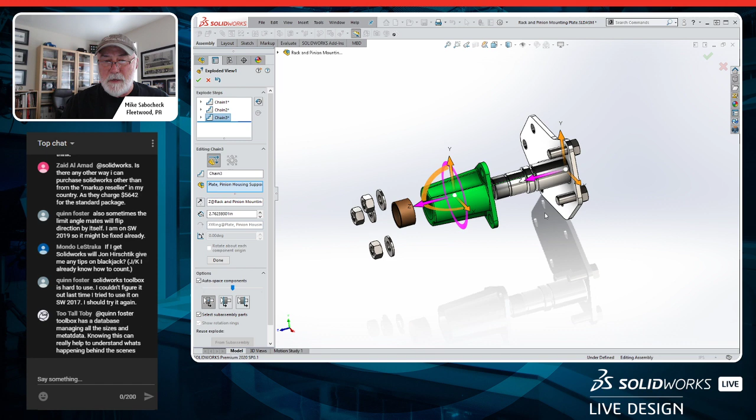All right, let's just move the nuts out a little bit and the washers out a little bit here. We're done with that step, so let's get the bushing moved out to approximately there. And lastly, we'll move out the housing, or the support, I should say, and bring it out approximately there. Okay, hit the green check mark this time, not the escape key.

And then we can also animate this, the collapse of the assembly, so we could use this even as assembly instructions if we wanted to. Just a cool way of being able to create a nice animation of our assembly here.

Okay, so we've got our assembly created. Let's just kind of look over some things that we've done so far. We've created our concepts. We went through three concepts for the support, going from something fairly simple to something a little bit more attractive, as we see right here. We created our properties, or captured our properties.

In fact, I'm going to show you one more thing about the properties before I leave the assembly here. And then we came over here and assembled our bushing. We executed the smart features for it, so we got our bore at the right size, created our documentation. We started it, and we still need to do the assembly drawing yet, and we're going to do that next.

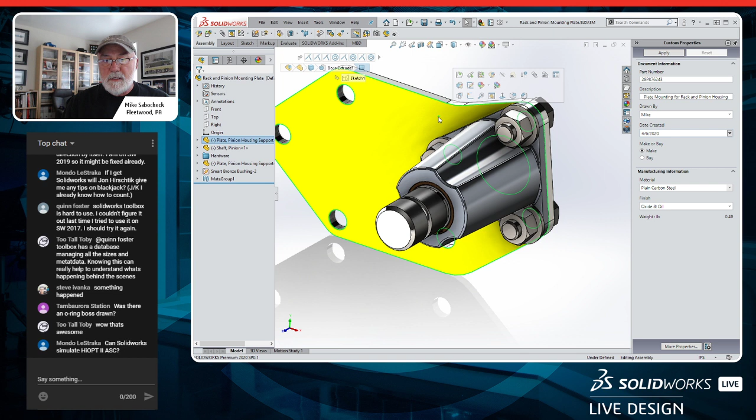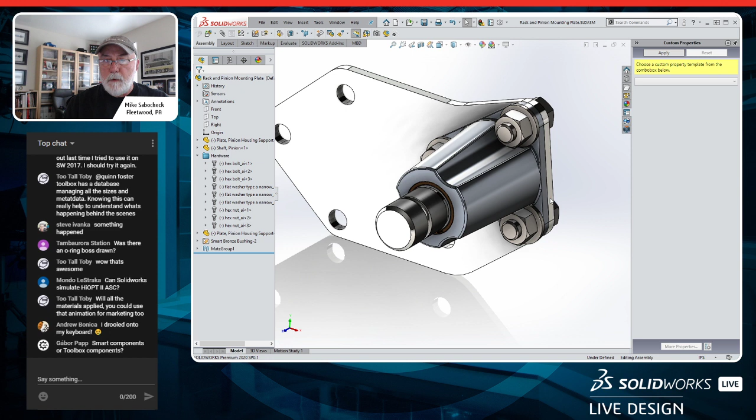And as I said, if we come back into the property page here, if I click on any of the components in this assembly, I get to view all of their properties. No matter which one I'm selecting, I'm able to look at and review the properties, even for instance a nut, the washer, or the screw. So it doesn't matter which components I have in this assembly, I'm able to view their properties without having to go into each one individually.

Okay, so we've saved off our work. Let's make an assembly drawing, because on the assembly drawing we'd like to have a bill of materials. And that exploded isometric view that we created is available for me to simply drag and drop into my drawing.

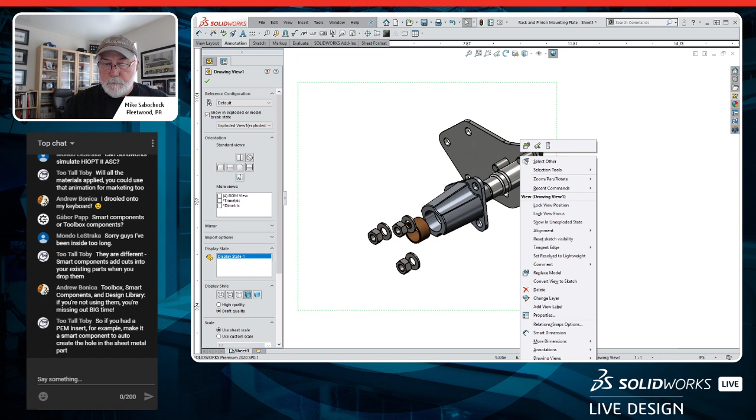Okay, let's shade it, it looks a little bit better. Next thing we can do is introduce a bill of materials. For each one of our components, we'll just use the standard bill of materials template, and we'll put that up in the upper left-hand corner. Let's go into annotations, and we'll auto balloon all the components here in this assembly.

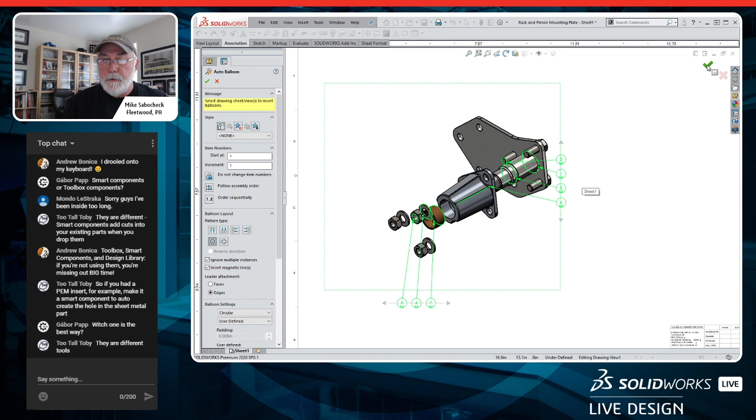Now, I don't know if everybody knows about magnetic lines for these balloon annotations. I'm able to manipulate all of the balloons we see right here. I can even pull a balloon away and anchor it back onto another magnetic line, and reorientate my magnetic line the way I'd like it. So something like this, extend things out, and the spacing will be maintained for me, being equal. I don't have to worry about balloons with their leader lines crossing each other.

For instance, maybe this balloon right here, its leader would be better off over here onto, let's say, that screw, as opposed to the other one, so we're not losing track of where it goes as it goes into the part. So just a lot of nice ways of being able to do that.

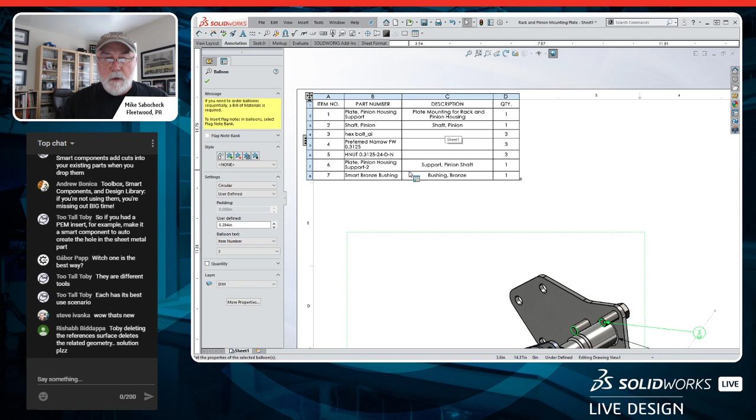Also, up here we get a full listing of all of our components and their quantities, and those quantities will always be maintained for me no matter what. I can also add additional views if I'd like to - for instance, maybe we'd just like to have an isometric of the assembly completely assembled.

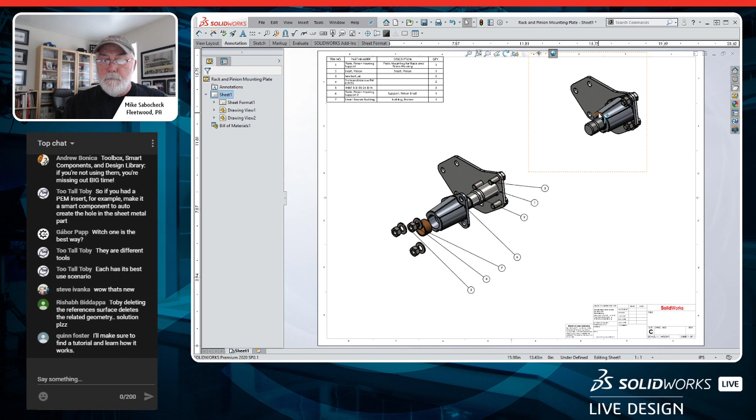And we can have that shaded also, or whatever. We can also put in front, top and right side views - anything that we want on these particular drawings is fair game.

All right, so we can go back and open up the assembly one last time, and again admire the work that we've done. Okay.

All right, so let's kind of recap what we did. We're coming up close to the end of the hour. So we designed a new pinion shaft support, all right - excuse me, getting my words mixed up here. And that design was based upon my existing parts, and again modeling up those existing parts in SolidWorks so that I can use those as reference to create my new part.

I used in-context design, and this was a good case for in-context design because this is a one-off part - I'm not too concerned about using that part in some other assembly, which may cause some conflicts as far as the references are concerned. And again, you have full control over whether or not you decide to use in-context relationships; you can turn those things off as you go along.

I captured the properties that I wanted using the property tab, and then I showed you how you could build that property tab and the interface for it using the property tab builder. So keep that in mind and be able to use that. Again, it's very easy to just drag and drop what you want and configure.